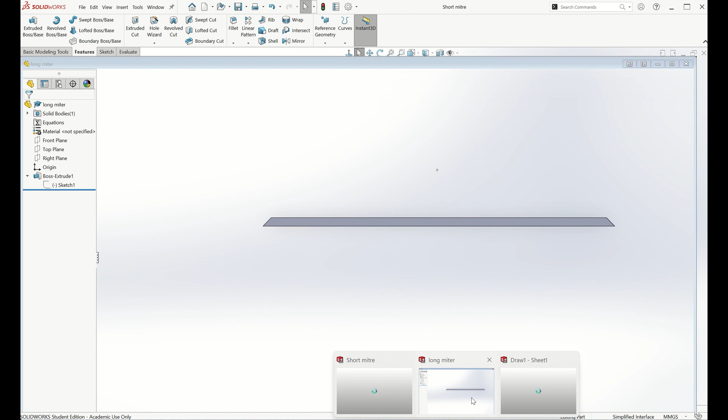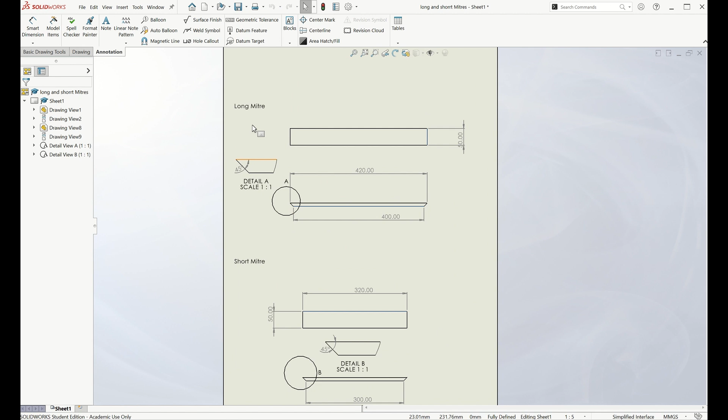Again, we've drawn a few lines, doing a wee bit of extruding. The tricky part of this is setting this angle to 45 degrees. But if you follow the videos, you will be fine. So again, here is our working drawing, has all our dimensions on it. You can see the long mitre at the top, short mitre at the bottom.

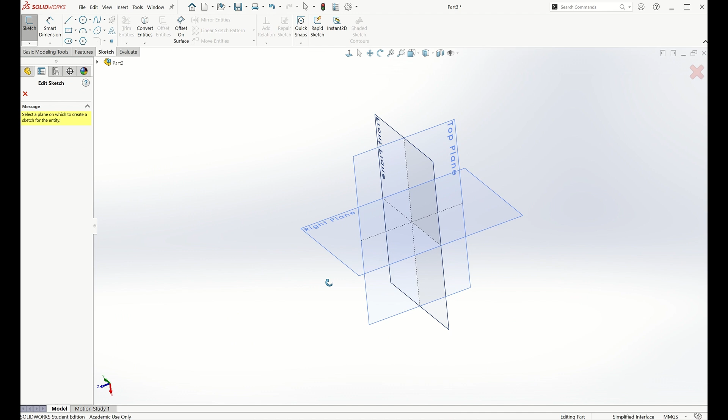So let's get started. So we're going to start with the long mitre. So you're going to open a new part just like always. New sketch. You're going to enter sketch mode again. And you're going to go to this top plane. Sorry. Sketch. And top plane. Then all you're going to do is you're going to draw a line straight across, and then you're going to smart dimension this line to be 400.

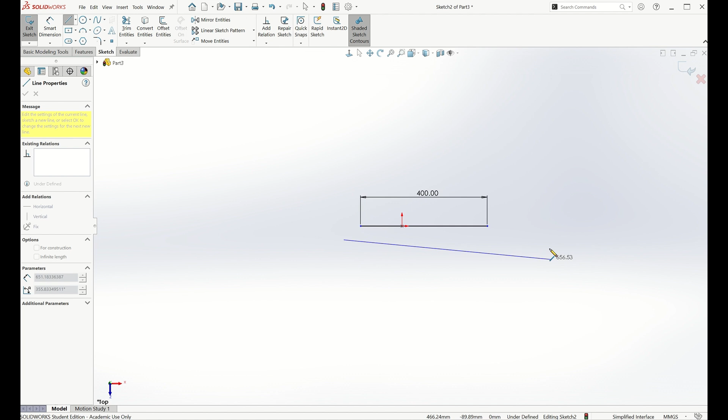Then directly below this line you're going to draw another parallel line, longer, has to be longer than the line above it. Then you're going to set the distance between these two lines to be 10 millimeters. Then if you scroll in to these corners, we can then start to draw our next line. So you're going to go from the corner of the shorter line out and overlap the longer line. So there has to be a wee bit of an overlap here.

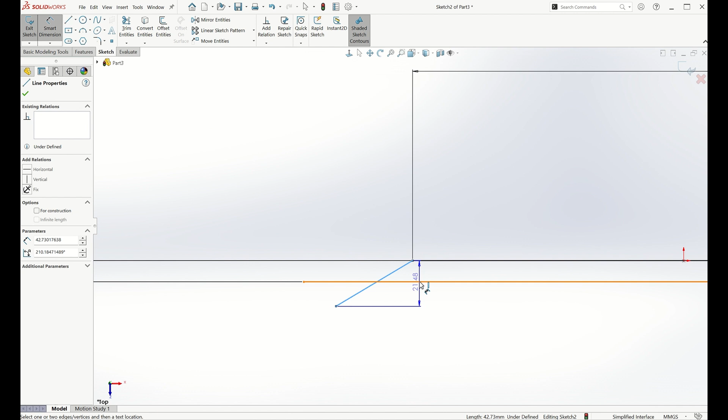Then you're going to use your smart dimension, and you're going to smart dimension this new line we've drawn. Then you're going to click the longer line, the bottom line, and you're going to come out here somewhere, doesn't really matter where, and you're going to put 45 degrees in there, and that's going to make that line 45 degrees. So we need to do the same from the opposite side. So just overlapping.

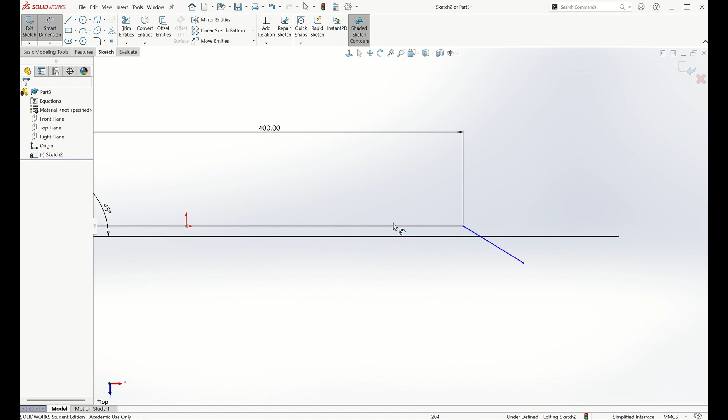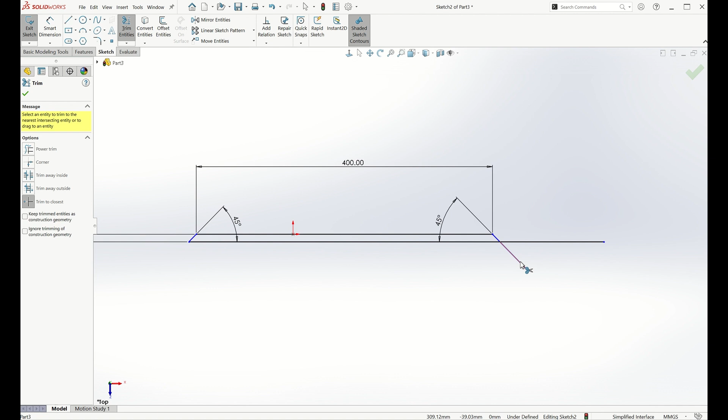Then you need to click between the short line, the long line, out here somewhere, and you're going to type in 45. Then all you need to do is get your trim tool, trim to closest, and get rid of the extra bits of the line we don't need. So that's our basic shape. You're going to go to your features, your extruded boss base, and you're going to extrude that by 50.

And then you're going to file, save. You're going to make sure you put it in the correct folder. And you're going to call this part long mitre, M-I-T-R-E, and save. Then we're going to do this basically all over again. The only thing we're going to change is our dimension. So you're going to go part.

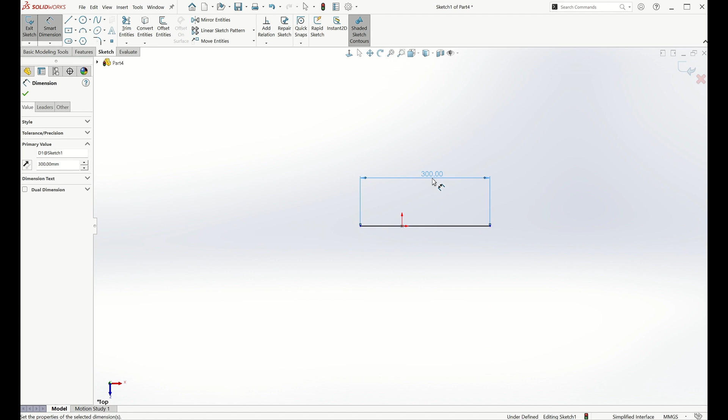Then you're going to go sketch, sketch again, top plane again, and we're going to start to draw in our line. Now this time instead of 400 you're going to choose 300. And then you just repeat the whole process, same as you've done before. Draw a line longer, make the distance between these two lines 10. Maybe you want to zoom in.

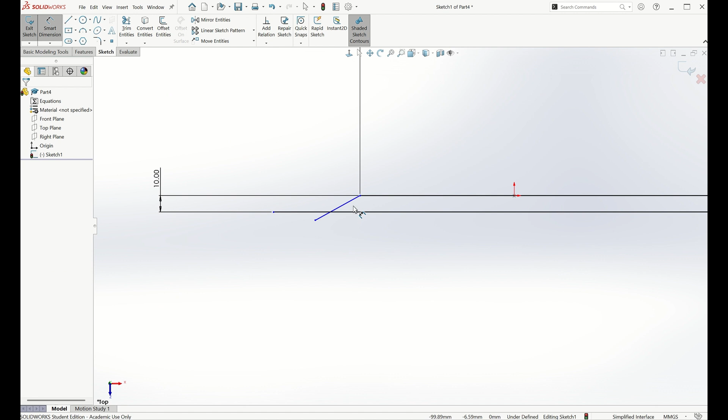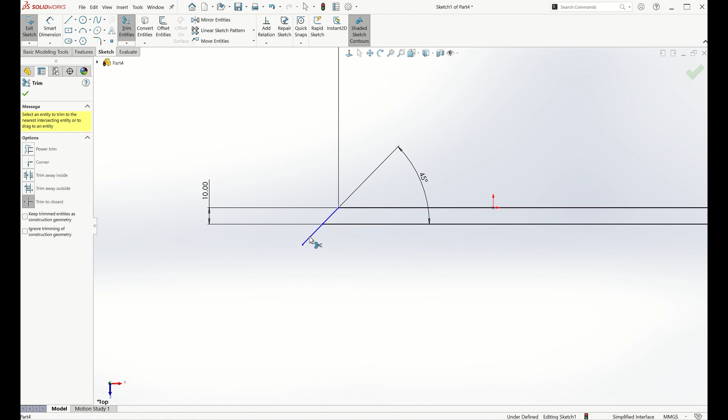I'll draw a line from here to here. Set between here and here to be 45. And you're going to do the same from the other side. Between here and here, 45. Then we're going to get our trim entities, trim to closest. What I'm going to do is get rid of all the wee bits we don't need. There we go. Features, extrude boss base, and we're going to extrude that again by 50.

Then file, save, and you're going to make sure it's the right folder again. And we're going to call this one long mitre. Sorry, short mitre. We've just done the long mitre.